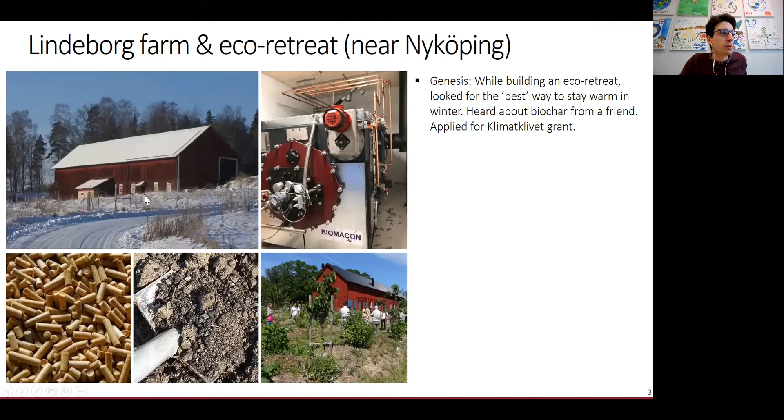The first one, Lindeborg Farm, which was where we performed our second case study, is not here today, but I'm speaking for them, and I'll also be speaking for a few other persons. So how did the story start at Lindebug? They were building or renovating this first building that you see there, and they wanted to find the best way to warm their house during the winter. They heard from a colleague that biochar existed and that it could produce heat. So they applied for a grant from Klimatklivet and got this biochar unit that you see in the second picture. They've been producing biochar since winter 2017-2018, which is also precisely when I started my PhD.

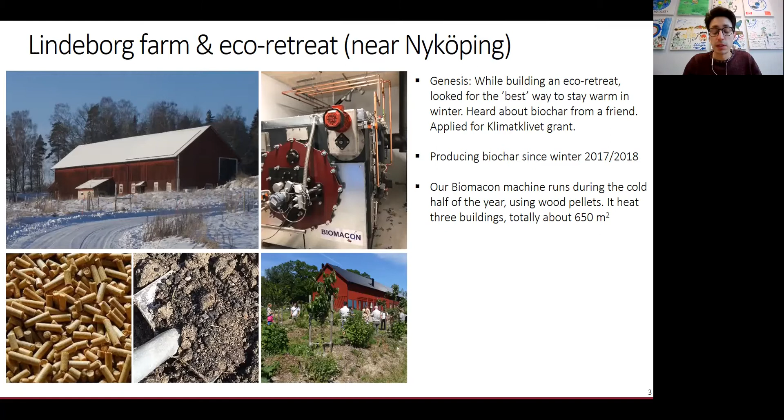The pyrolysis machine is running on wood pellets that you see there. It's used approximately half of the year to heat 3 buildings that equal about 650 square meters of living area. The biochar is used partly in their own gardens around the farm, and some is sold to soil manufacturers around. Lindeborg also wanted to share that in the first years, they had some issues running the pyrolysis machine because it was slightly over-dimensioned.

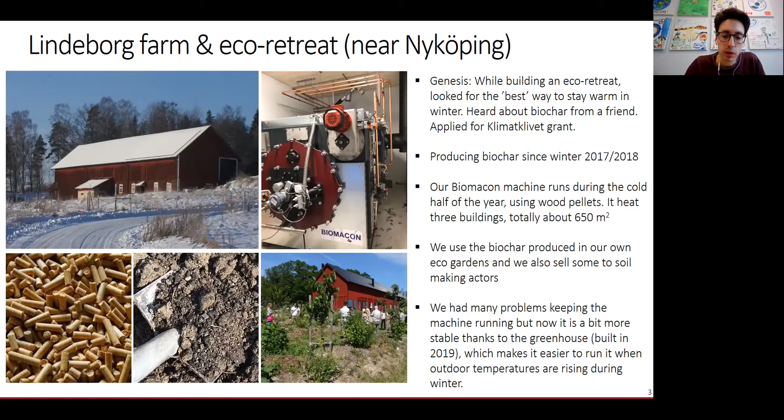In 2019, they extended their buildings a bit with a glass greenhouse, also partly heated in the winter, which smoothed and made it easier to run the pyrolysis process when outdoor temperatures were slightly high. That's what you see in this second set of pictures: on the left, where the greenhouse has been built, and how it is this year. Initially the plan at Lindeborg Farm was to produce biochar from local biomass that was available, but in the end, for safety of operations, they decided to go to wood pellets, a more calibrated and controlled feedstock. Okay, that was Lindeborg Farm in the area of Nyköping.

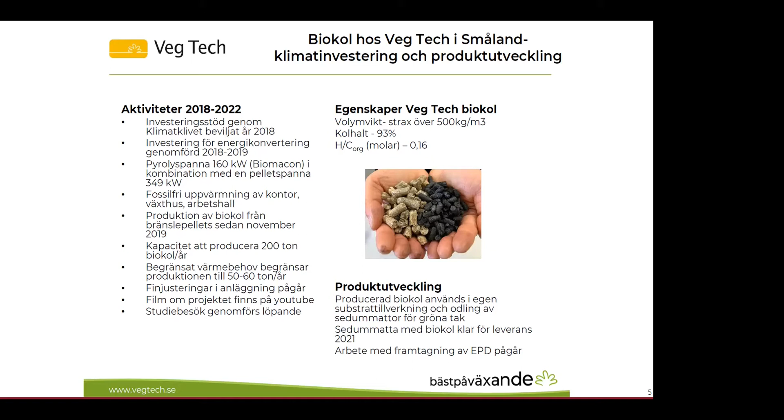We are heating our office, our greenhouses, about 2,000 square meters, and also another building for work in the production. We have wood pellets as a start, and we started the production of biochar in November 2019. The capacity is about 200 tons of biochar per year, but we have experienced that we don't have that much need for energy, similar to what you said before about Lindeborg. So we only produce about 50 to 60 tons of biochar per year.

We still have some adaptations to do within the biochar plant, fixing some mechanical things. And we have had several visits on the site showing the plant. About the biochar we produce: it's very high in density, about 500 kilograms per cubic meter. The carbon content is about 93%. And it's also very stable; the H/C ratio is 0.16.

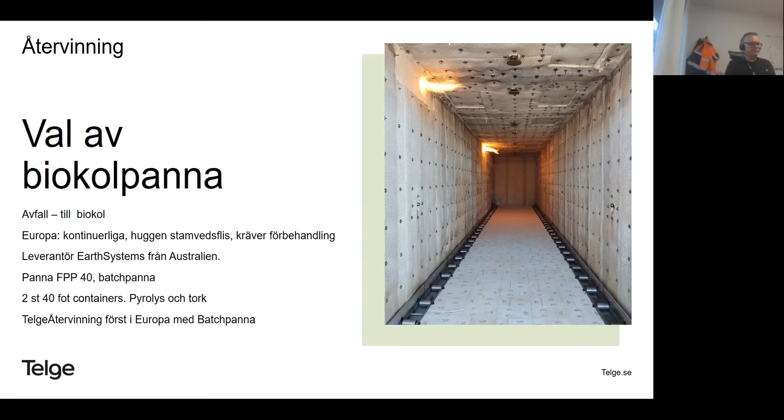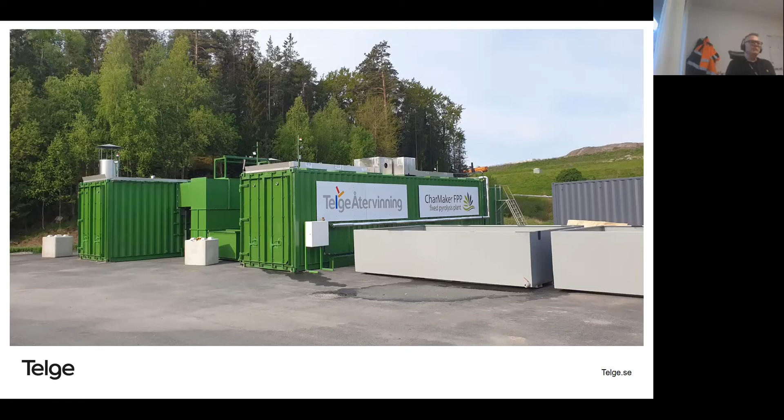On the right-hand side, the grey ones. We are using cages to get all the material and the biomass into the containers, and afterwards we put the cages into water baths, as you can see on the right-hand side, the grey one there. They are filled with water. So we stop the process there. And this is the quick run-through of the process.

Today we load the cages, we put them first in the dryer, and then we move them from the dryer into the pyrolysis chamber and pyrolysis container. When the process is ready, approximately after 6 hours, we take them out and put them in the water bath. The big difference between a continuous process and this process is that we do almost no work with the material before we put it in the cages.

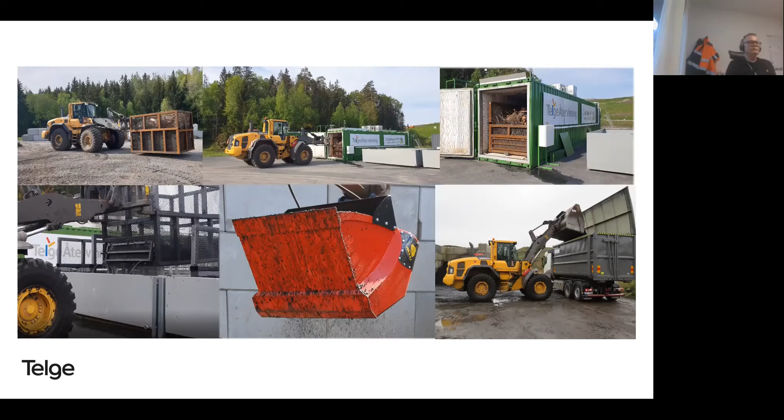We put the twigs and the branches inside a cage, loaded so that the heat can come to the twigs and branches. Afterwards, we crush them very easily with a crusher. That means we get the material to 0 to 15 millimeters, and then we load it onto a truck. So we deliver all our material in bulk instead of bags. I think there are not very many; I know there are some, but there are not many suppliers like that. Okay.

We are moving up; we're taking care of the waste, and we now make a product from it. So that's very good. From green waste, we are now making biochar. This is really good. This is from the people living in the county. Moving forward, we will increase the product. We have a plan to actually produce more. Today we are producing around 1,000-1,200 tons of biochar, and during the next year we will produce over 2,000 tons of biochar.

And we are also looking into new materials. Today we're only using twigs and branches, and this year we will start using root balls. We will do some pre-work with them and crush them a little bit, and then we will run them, and that will hopefully increase our product in the future.

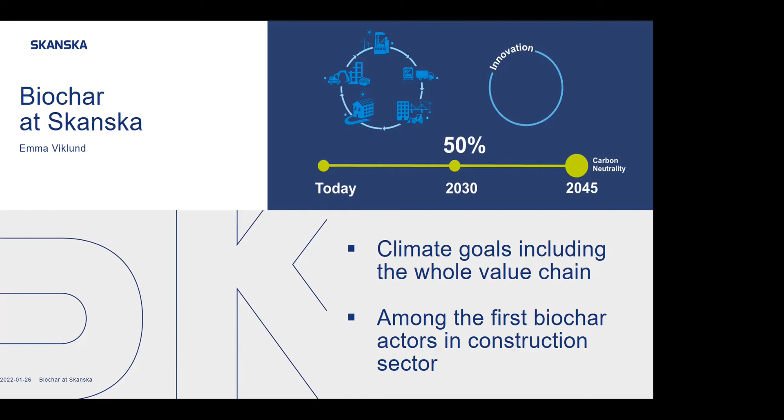Skanska is an organization that has set climate targets to reach climate neutrality by 2045, not only for their own scope 1 emissions, but they also want to include scope 2 and 3, so also the indirect and supply chain emissions. According to Skanska, this is the main reason why they are investing in biochar. They focus not only on the material, but also the waste and the entire flow of biomass through their activities. And they claim to be one of the first companies to invest in biochar in the construction sector.

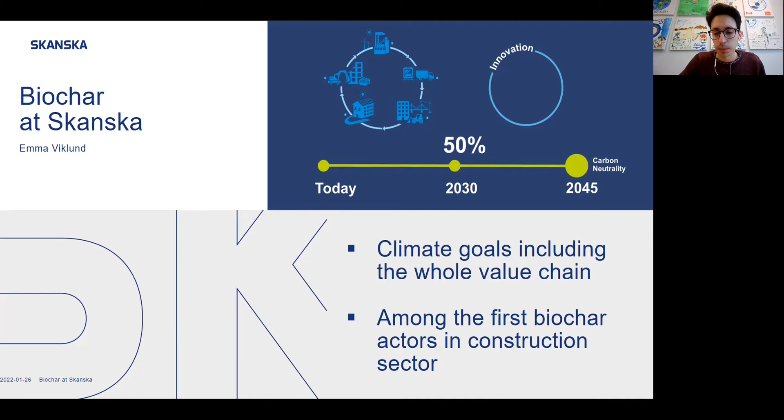And indeed, they made their first investment this year with a mobile pyrolysis unit that will look similar to the one from Earth Scan Systems. And that picture is taken from the website of the manufacturer. And that mobile unit is expected to be delivered in February, March this year, and will be placed in Skellefteå.

And it's not located in a city or on a waste management facility, but more on a site where they are actually clearing land. So it's called a development project. And a lot of stubs and branches have been stored on that site, waiting to be pyrolyzed before being valorized and then transferred for use in different areas.

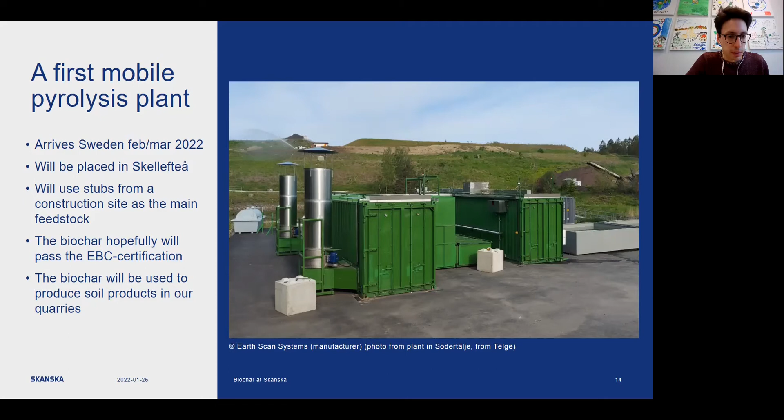And the biochar will hopefully pass the EBC certification, and they will manufacture soil products in their quarries that will then be used in urban areas mainly. So a mobile unit coming, I think the first one in Sweden, it will be a mobile one.

Next one is Edward Hamilton. If you're here, Edward, I saw you earlier today.

Yes, thank you, Elias. Yes, I run the farm Hjelmstedts egendom here on Kinnekulle. It's an old family farm, and why I say it's old, we have a lot of old houses and they have a huge heat demand. So approximately now we are heating 2,500 square meters of old houses that are not very efficient.

And why my interest started in biochar was the grain production here on this mountain. We have a very limited amount of soil, and we get less rainwater because we are on the west slope here. Very beautiful view, but it doesn't feed the stomach or pay the bank. So that's why I got interested. And we came across biochar early, in 2016. And now we have the 160 kilowatt machine here running for now 4 years, almost exactly.

And yes, you can see I have a glass of champagne here. Of course, you have to have that in a presentation, I think. We do have a lot of weddings. We do have a lot of other stuff here, and everything needs heat a lot, so that's why.

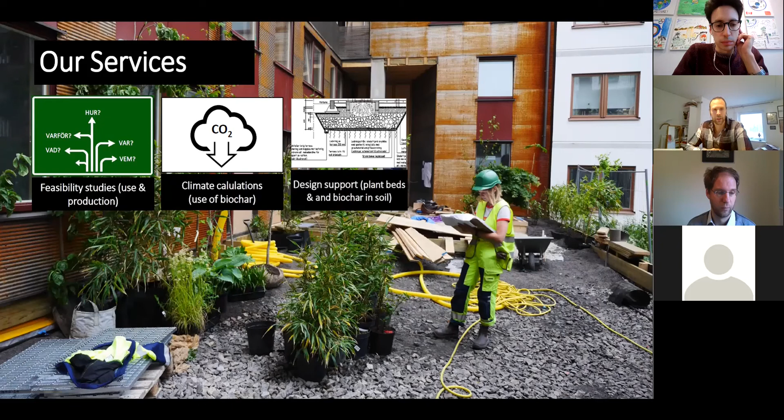So in Ecotopic, we are supporting companies and other entities with feasibility studies or that type of work, and, as I said before, with funding and that kind of stuff as well. We're calculating carbon credits so that the companies can be carbon neutral with biochar. And we are design supporting different projects as well, especially with Jonathan's expertise when it comes to plant beds and green roofs and so on.

Next, please. So the Biochar Products company, we are developing new soils. We are doing the same soils as the others as well, with carbon and macadam soil, as Britt-Marie told about. But we're also now looking into more recycled materials, so now you can buy 100% recycled soils from us. We're also looking into a very interesting market where we add biochar into concrete.

So we have this plant bed, where you plant the trees in, as a product, and we are selling biochar, both with and without carbon sink. So from us you can buy biochar products with the carbon sink and get a certificate for that. Next slide, I think, is the last.

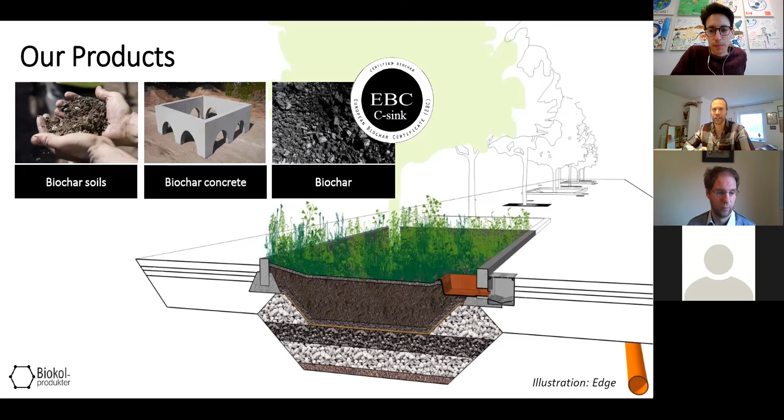Cecilia Hermansson. I work at Hushållningssällskapet Sjuhärad, and we are currently running a quite interesting project about creating a standard to certify these carbon sinks, as some of the other speakers have already talked about. The project is about a three-year project. We are finishing in March next year. And the aim has, from the beginning, always been to create a functioning market for carbon sinks by biochar in Sweden. Next slide, please.